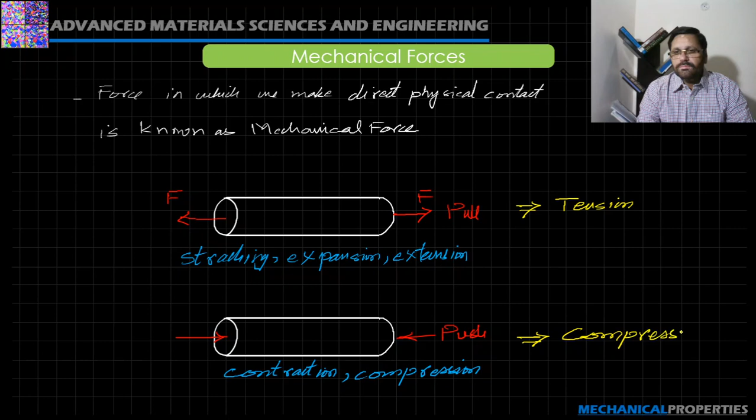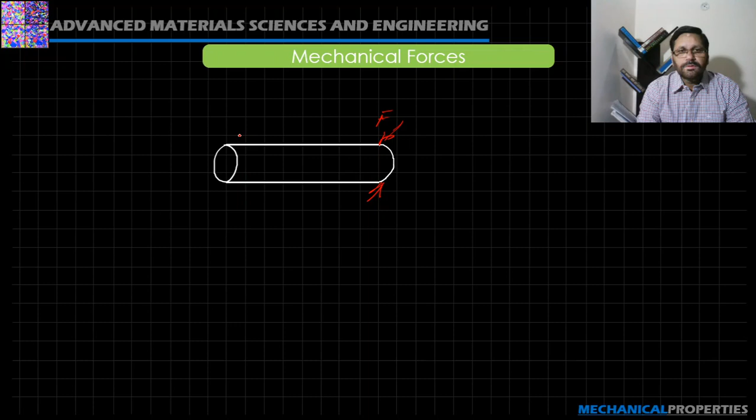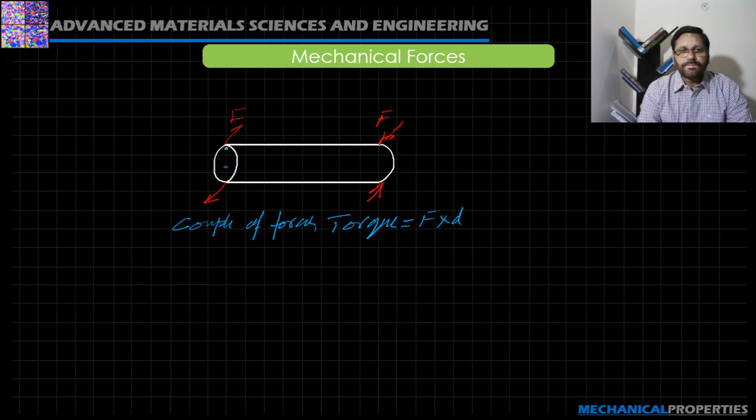Now take another example. In this, the loading condition or application of force is like this. So here we have a couple of forces, meaning torque, and this is the distance d. These kinds of loading conditions are termed as twisting or torque.

Similarly, we take another example on the same specimen but the application of force is like this. Here the non-collinear forces, but equal and opposite in direction, cause a break, cut or shear of the specimen. These types of loadings are termed as shear loading conditions.

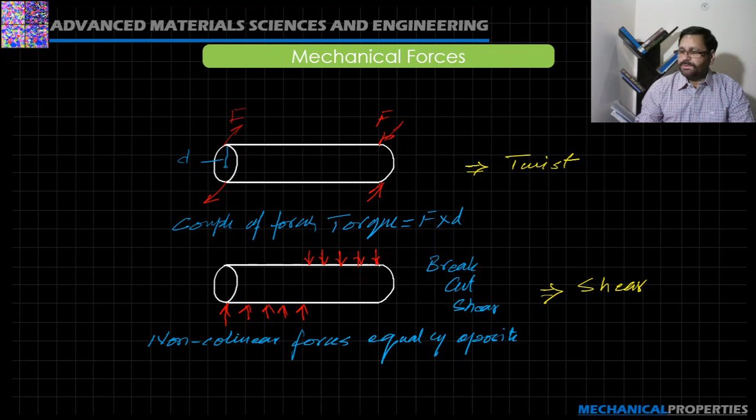Now the easiest and quickest way to know several mechanical properties of the material is using a universal tensile machine. In this universal tensile machine, the specimen is fixed between these two jaws, and the stress-strain behavior or curve is plotted using these computers.

Now as far as specimen dimensions are concerned, as per ASTM standard E8, the specimen dimensions could be like this. This is the gauge length which is marked, and this is the gripping section where we can use this section to grip into the jaws of the machine, or we may have a hole in the specimen to use a pin for holding it. Further, instead of having a sharp cut, we have some curvature, so that additional stress concentrations are not produced in this material, and we know the exact stress and strain behavior of this specimen. So this is the gauge length.

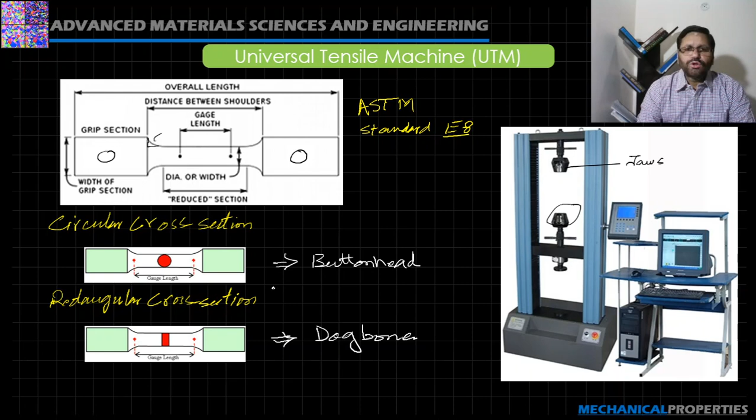Further, the specimen may be of circular cross section like this, or maybe rectangular cross section. This circular cross section specimen is also termed as the button head specimen, and this rectangular cross section is also known as the dog bone specimen. Now using these specimens we can calculate the stress and strain of this particular material.

Let's say this is the same specimen, and in this specimen the application of force is by using these grippers in the jaws, if we are taking the loading of tensile. Now in this specimen, this is the gauge length L0, or the initial length of the gauge.

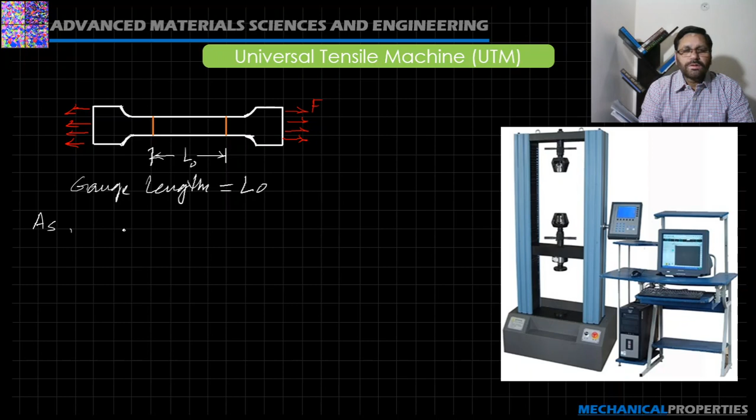Now as the force increases, the change in length from the initial length L0 to an instantaneous length L, it starts stretching. Now this is the elongation, the change in length. Once the material is under tensile loading, which is delta L, L minus L0.

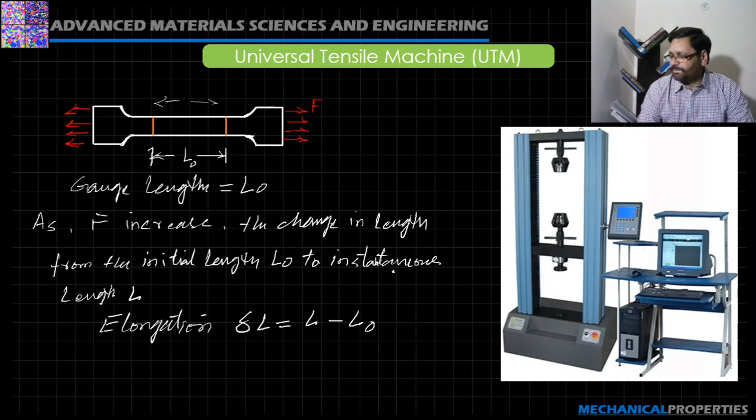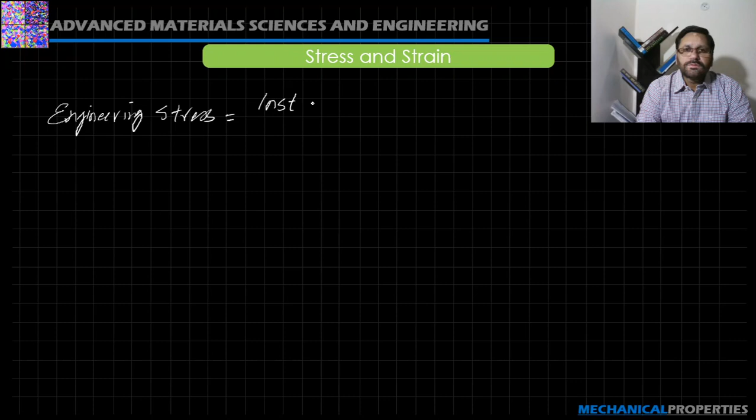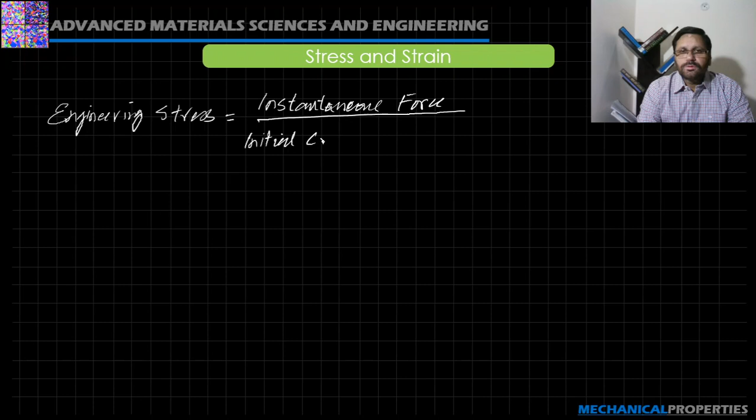Now further we can calculate the engineering stresses. These are instantaneous force upon the initial cross-sectional area of the specimen. Since stresses are denoted by sigma, instantaneous force is F upon A naught, which is the initial cross-sectional area.

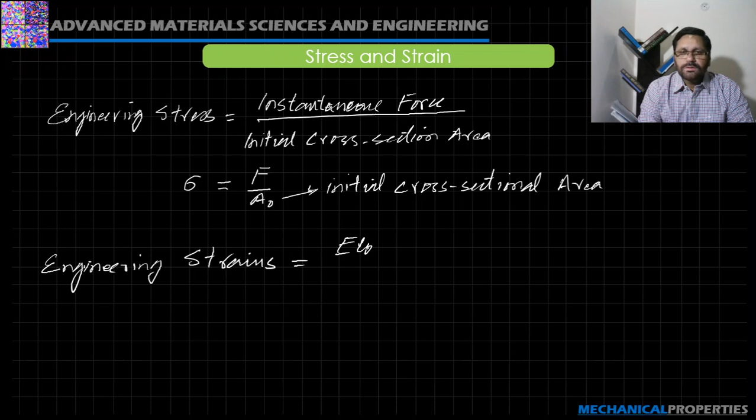Similarly, engineering strains can be made by this expression: elongation divided by the initial length, that is the gauge length. So epsilon, the strains are represented with epsilon, is equal to del L over L naught, or L minus L naught over L naught, or further we can write this as L over L naught minus 1.

Now with this we end our discussion here.

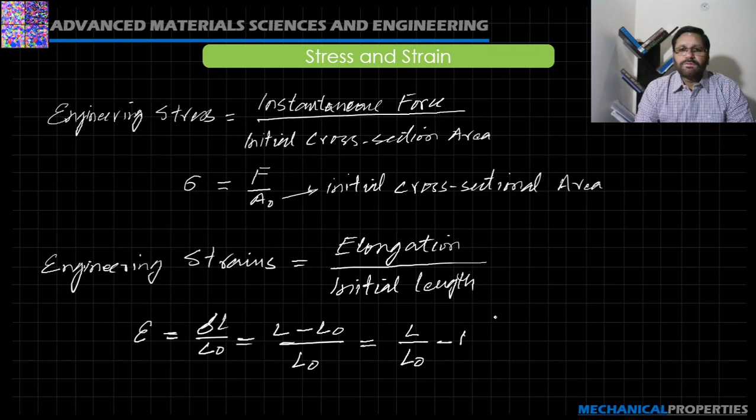Bismillahirrahmanirrahim. We will continue with the topic of mechanical properties of materials. In the last session we discussed how to measure stress and strains. Now we will discuss the stress-strain relationship using Hooke's law.

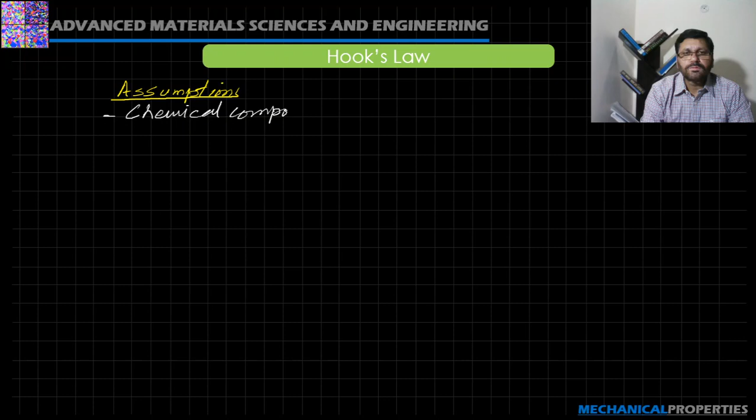For the application of Hooke's law we have some assumptions. Let's say the chemical composition of the material is constant throughout. We may have some imperfection in the material because of the manufacturing processes, but we assume that the chemical composition is same for the entire material or the specimen.

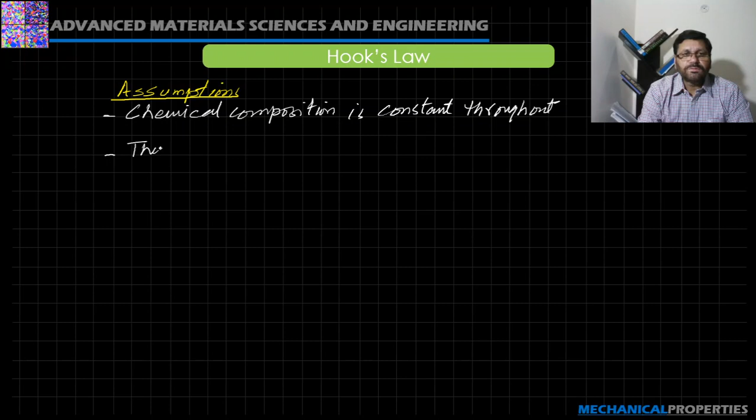Then there is no change in temperature during loading, as we have seen how significantly the microstructure is affected by temperature. So we assume that during loading the temperature remains the same.

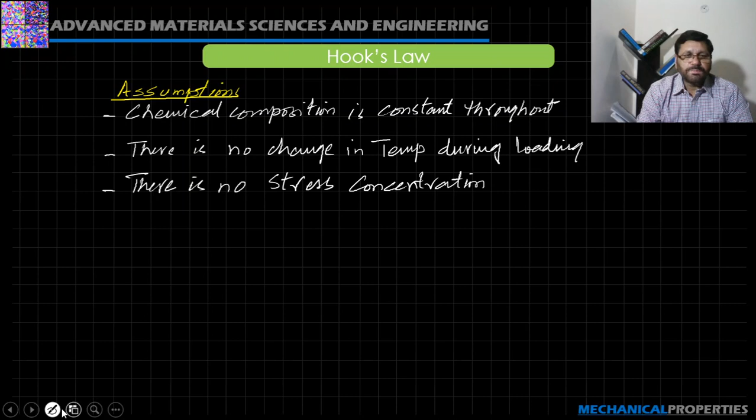Then there is no stress concentrations, and the specimen of the material is of prismatic cross section. This means if we have a specimen, then we assume that the cross section area is the same all along the length of the specimen.

But if we go for microscopic analysis of the surface of the specimen, we observe some waviness on the surface. Because of this waviness, let's say at this location the cross section area is minimum, and if we calculate stress using the expression sigma equals P over A with a minimum area, we will get the maximum or higher stress value. So stress concentrations are there in the specimen.

So we assume that the surface is perfectly smooth for that very specific specimen of the material.

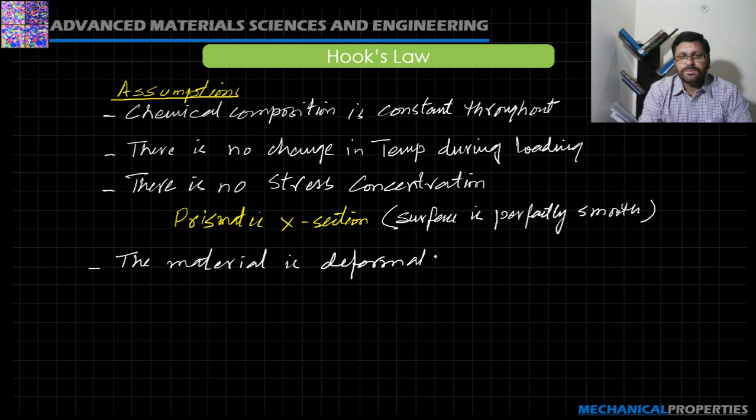Now further, the material is deformable, because Hooke's law is applicable for material which is deformable.

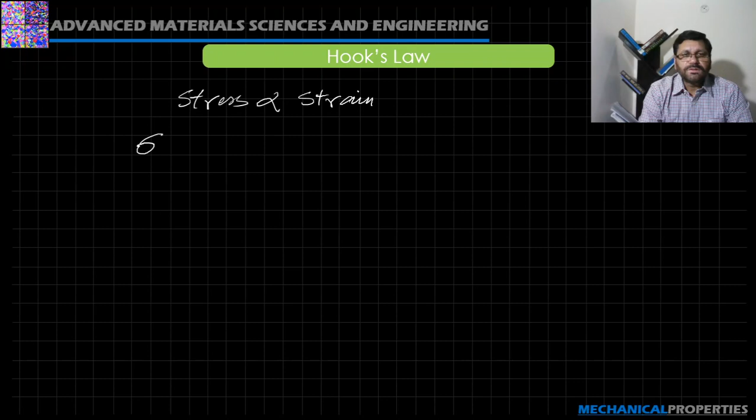Now using these assumptions, Hooke's law states that stress is proportional to strain. Considering different stresses, we have discussed normal stress, so sigma is proportional to epsilon. If you take the example of shear stress, tau is proportional to gamma. By removing the proportionalities, we will get constants in the expression.

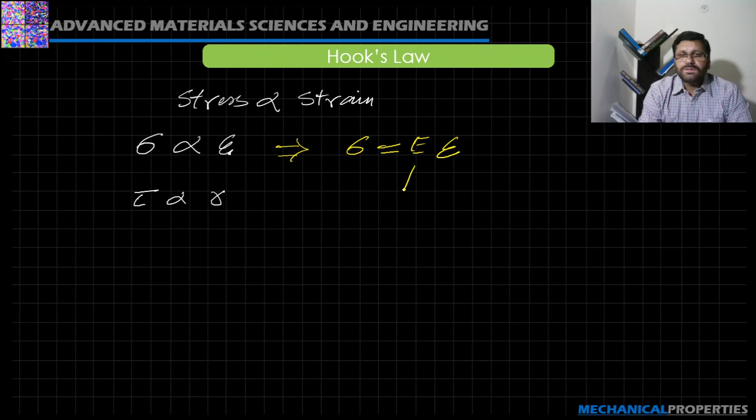So sigma is equal to E epsilon. Now this E is the modulus of elasticity or Young's modulus.

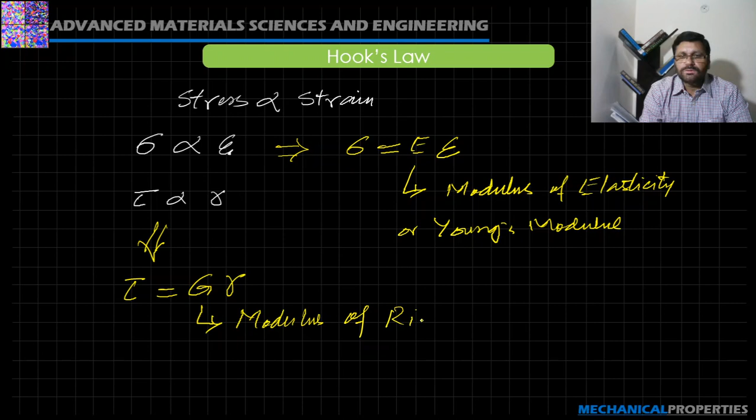And for the shear stress case, we have tau is equal to G gamma. Here G is the modulus of rigidity.

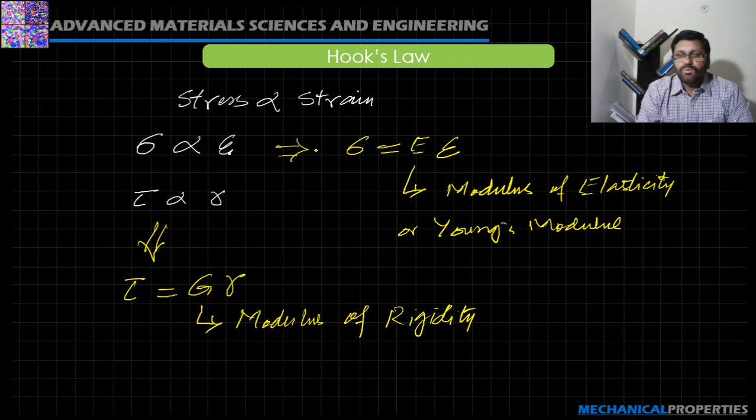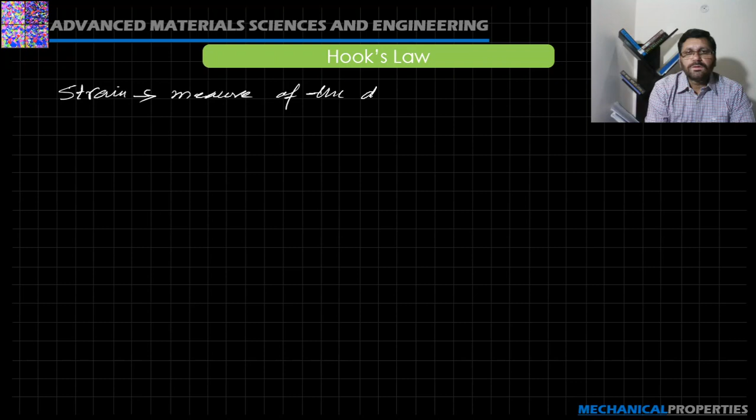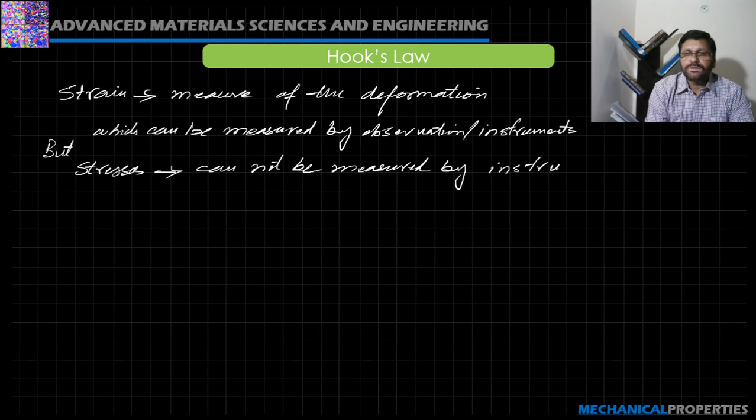Now we also know that strains are the measure of the deformation of the material, which can be measured by observation using instruments or different gadgets, but the stresses cannot be measured using instruments or gadgets, because these are the internal resistive forces of the material.

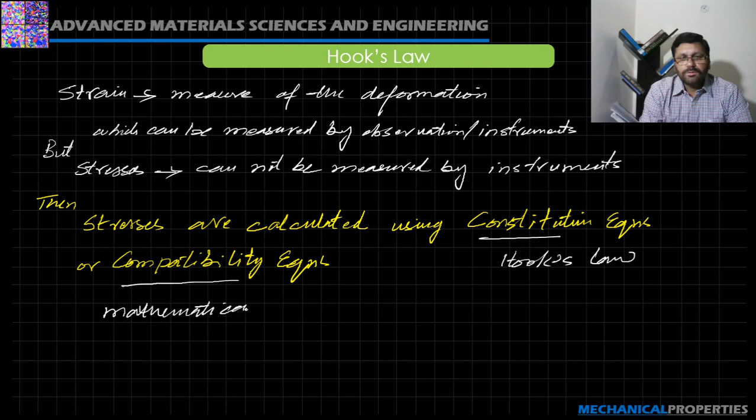Then the stresses are calculated using constitutive equations or compatibility equations. Here constitutive equations means by application of Hooke's law, and the compatibility equations means the mathematical expressions which depict the actual situation.

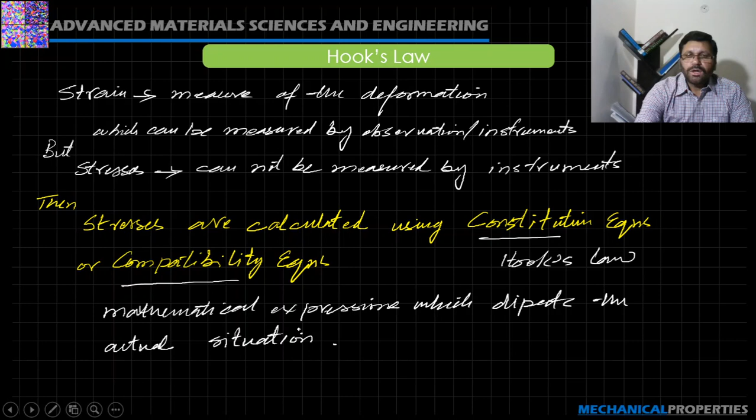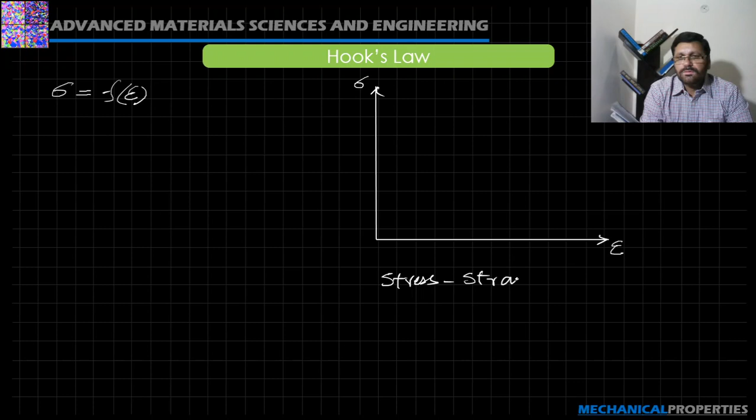Now, as we say the stress is a function of strain, if we plot the stress-strain relationship, then this plot is going to be known as the stress-strain diagram.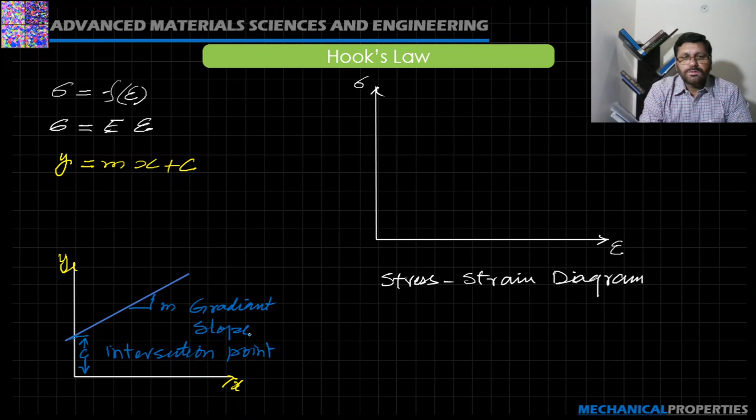the intersection point which intersects the y-axis at c, and m is the gradient of the straight line, or slope of the line.

Comparing this equation with the stress-strain relation, we say sigma is compared with y, epsilon is with x, and this E is the gradient or the slope, and here c is zero, meaning the line passes through the center or the origin of the stress-strain diagram.

So if we draw a line on the stress-strain curve, this is going to be the gradient or slope of the stress-strain curve, which is E, the modulus of elasticity.

Now further, this relationship does not hold good for infinite loading.

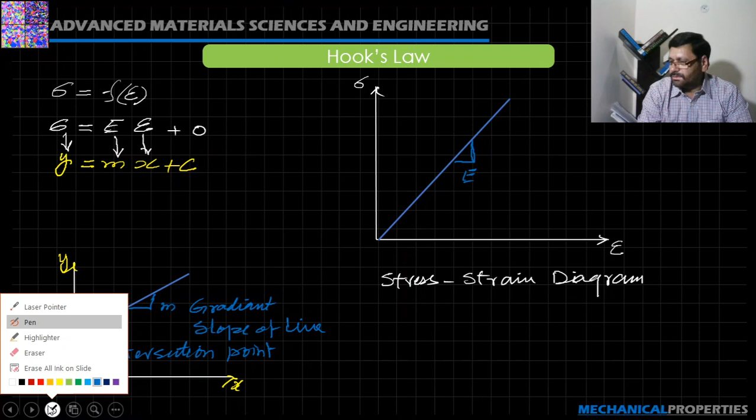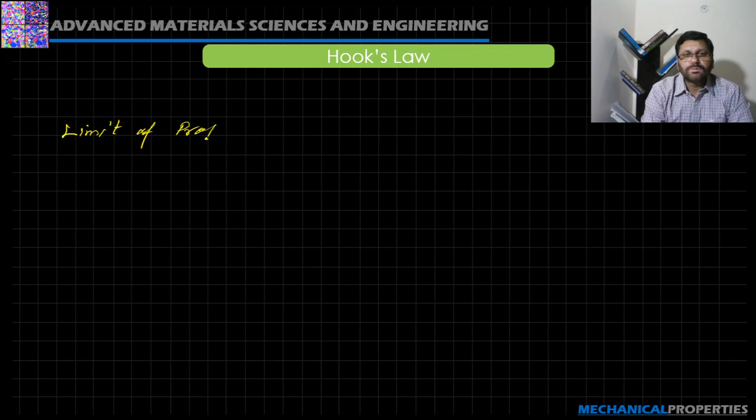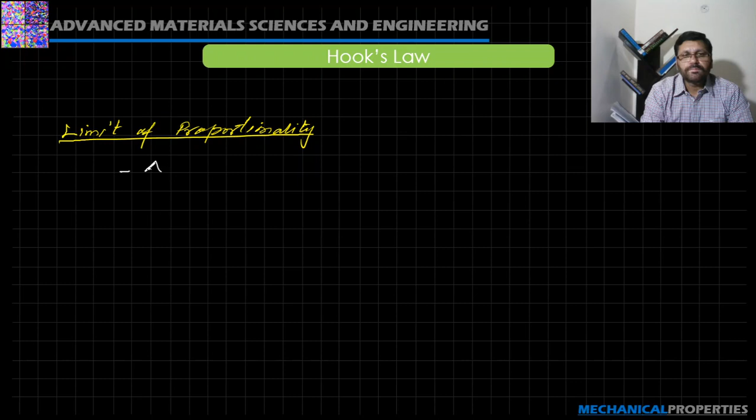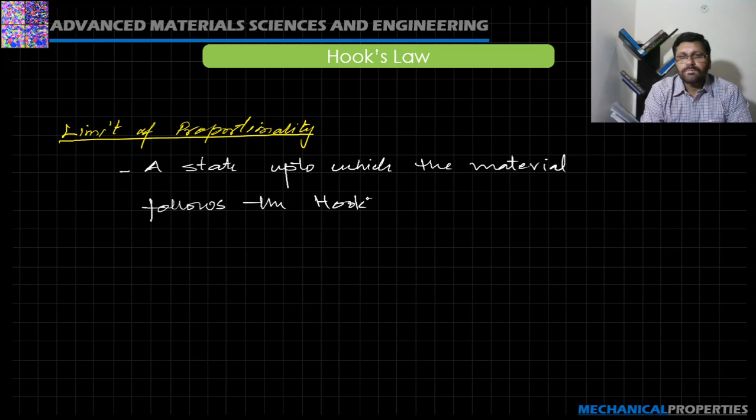There is a limit, up till that this relationship holds good. At that state this relationship is applicable. This state is known as the limit of proportionality. We can define it as a state up to which the material follows Hooke's law, because this doesn't hold good for infinite loading. So up till that loading which is applicable, that limit is known as the limit of proportionality.

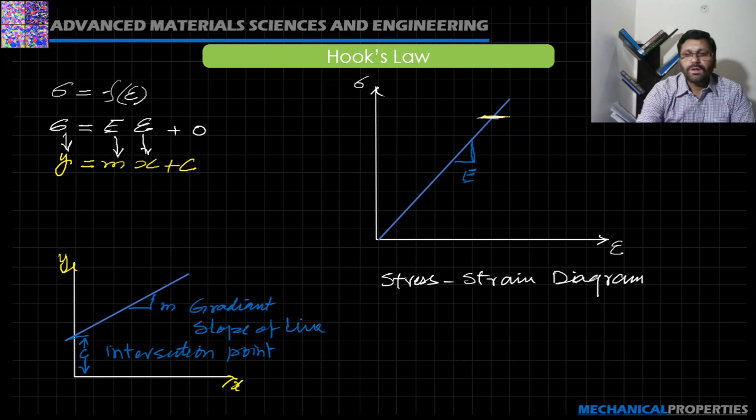Now further, we say sigma is equal to E epsilon, or we may say E is equal to sigma over epsilon. Since strain has no units, the units of modulus of elasticity would be the same as that of stress, which are Newton per meter square, or Pascal.

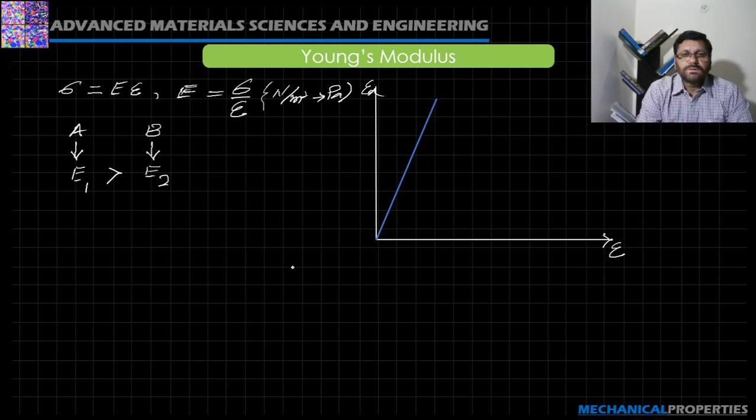If we take the example of two materials, let's say A and B, A is having modulus of elasticity E1, and B is having modulus of elasticity E2. We assume that the modulus of elasticity of material A is more than that of material B. If we plot this on the stress-strain diagram, this is the modulus of elasticity E1 for material A, and the modulus of elasticity for material B is E2.

At some value of stress, let's say sigma 1, we draw a horizontal line which cuts these straight lines. From this intersection, we have the value of strain for material A, let's say epsilon 1, and from this intersection we have the value of strain for material B, epsilon 2. This indicates that epsilon 1 is the strain in material A at stress sigma 1, and epsilon 2 is the strain value in material B at the same stress sigma 1.

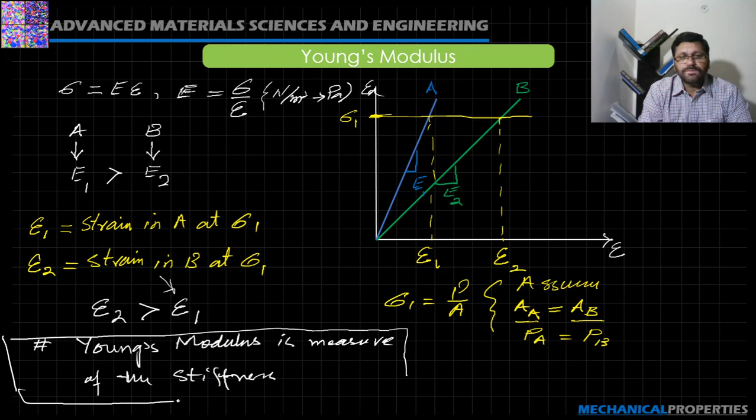Further, we say the Young's modulus relation sigma is equal to E epsilon, and if we write this as P over A is equal to E del L over L, and if we assume del L is equal to L, this will cancel out and we will have E equal to P over A, which is equal to the stress. This indicates that whatsoever is the length of the material of that specimen, if we apply the stress equal to the value of modulus of elasticity, there would be double the length of that specimen.

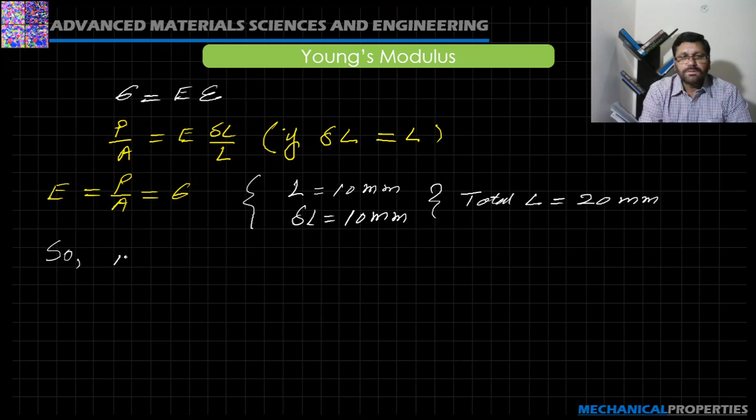In other words, let's say the initial length of the material is 10 millimeter, and after application of stress equal to the value of Young's modulus, the del L is going to be 10 millimeter. So the total length is going to be 20 millimeter. So applying the stress equal to Young's modulus doubles the length of that specimen of the material. So we can define Young's modulus E as the value of stress which can double the length of the specimen.